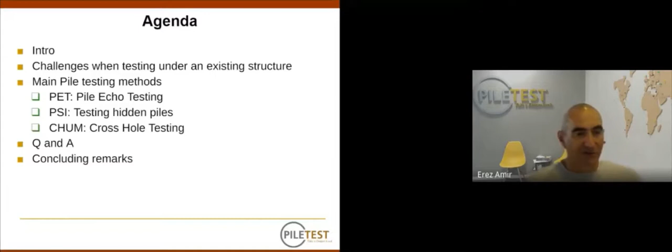Some definitions: a pile is a slender deep foundation element. It can be precast or cast on site. When I say slender, it means it's much longer than it is wide — something you probably already know.

A superstructure, or structure, for this presentation, is just anything connected on top of the pile. It can be a beam, a slab, a column, or the complete structure — anything lying connected firmly to the top of the pile.

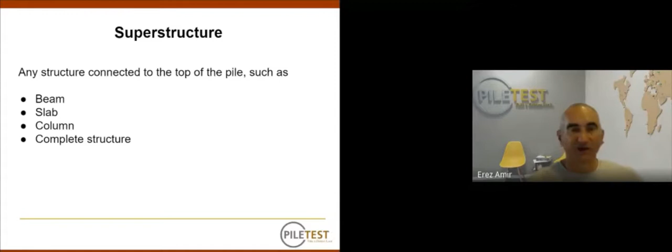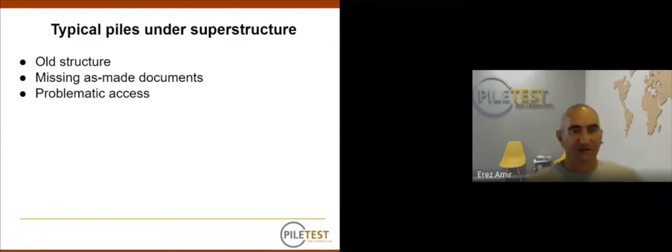The typical scenario for piles under a superstructure is that they are usually old. We don't have the as-made documents, or we have only very partial information. Also, typically, access is problematic. Not all cases are like this, but this is a typical scenario.

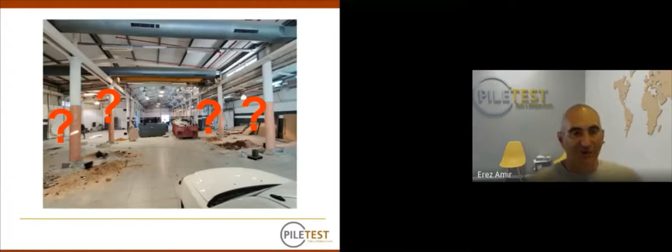So what are the challenges we face when testing the piles? First of all, we have limited or no information about the estimated length of the piles, the concrete type, the installation method, or the type of foundation. It can be a footing — we just can't know from the top.

Another issue is that the existing structure interferes with the pile — it actually changes its properties, the mass, the impedance, and the way the waves flow.

We also have a small sample. Usually the strength of pile testing comes from testing many piles and comparing them to one another, but under an existing structure, we have only a limited number of piles to test.

Physical access is also sometimes tricky, which makes testing conditions less ideal and harder to get quality information. Underground utilities such as basements can also interfere, as can sewage lines we don't know about. All these things add more and more challenges to testing under existing structures.

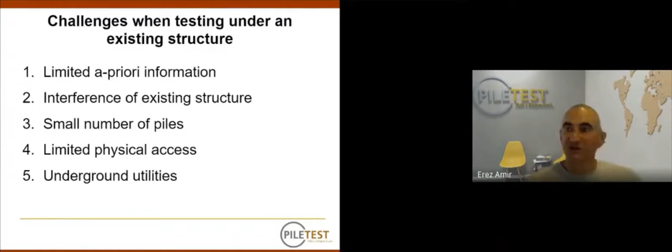The main integrity methods we are going to discuss today for testing under structures are, first, the pulse echo method. It's a very known and popular method backed by an ASTM standard. It is, let's say, so-so suitable for testing under existing structures. In many cases it is, but there are many caveats to watch.

The parallel seismic method is definitely suitable for testing under existing structures. In fact, it was designed for testing in those scenarios. The ASTM standard for this test method is currently in final ballot on the ASTM main committee, and it's going to be ready, I believe, within a month. The technical contact for the parallel seismic standard is Dr. Joram Amir, a co-founder in our company.

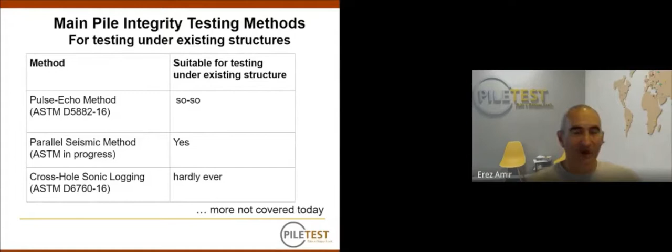The third method we're going to discuss is the cross-hole ultrasonic monitoring or logging, also called CHUM. This method will hardly ever be suitable for testing under existing structures, but I still want to mention it because there might be some cases where this could be applicable. So it's good to have this somewhere in the back of your mind that it's possible.

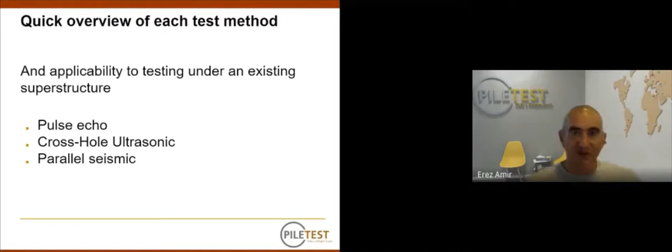So without any further delay, let's go into each of the testing methods and see how it's applicable. Let's go. First, we're going to discuss the pulse echo method, PEM, with our product PET. We're going to watch a short video, a 3-minute video, and then see how this method can be modified and applied to testing under structures.

PET, Pile Echo Tester, Low Strain Impact Testing. The mission: test the integrity of 12 concrete piles on this construction site. The tester goes to the first pile and prepares the top for testing.

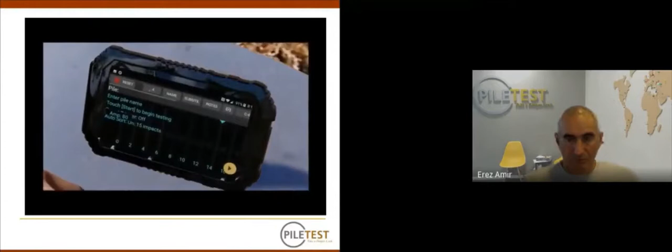A small amount of special putty is attached to the bottom of the PET. The PET is pressed against the pile top. The top is lightly hit with the hammer. A compressive wave travels down the pile and is reflected back from the toe. The blow is recorded on the screen. Good pile. The next pile has a defect that reflects the wave.

The reflectogram on the screen shows a necking at a depth of 5 meters. The test results are now analyzed in the office and the report produced. The PET, your compact yet powerful tool for testing the integrity of deep foundations. Thank you.

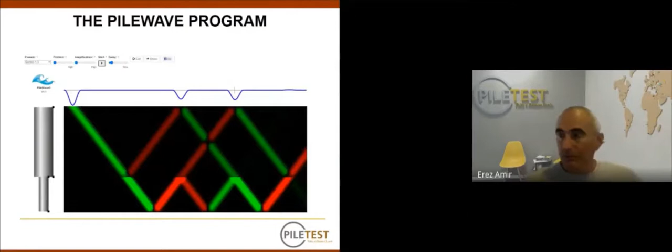Okay, and we are back. The next thing I want to show you is the Pilewave Program. The Pilewave Program is a simulation of wave propagation in piles, which gives some background about how this method works.

So when you go to the Pilewave application, you can see that screen. On the left, we see the shape of the pile. The main pane shows the way the waves are traveling down and up in the pile, and the top pane is the head velocity of the pile. So we can see that when we hit the top of the pile, let's do that with some delay.

Okay, so this is the hammer impact, and a compressive wave is traveling down the pile. The wave keeps on traveling until it reaches the bottom of the pile. At this stage, it is converted from a compression wave to a tensile wave, and then it reaches back the top of the pile, pulls it down again, and that's about it.

If we have some kind of a defect in the pile, for example a necking here, that's also going to reflect the wave. So some part of the wave is going to be reflected from this defect and from the bottom of the defect. Then the rest of the wave travels all the way down and back up, and we see the echo from the top. If, however, instead of a necking, we would have a bulge here, this part, instead of traveling down representing a compression wave, will be going upwards, like that.

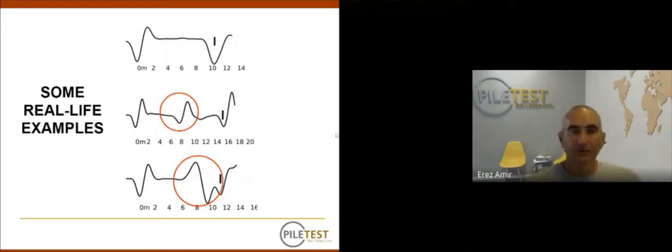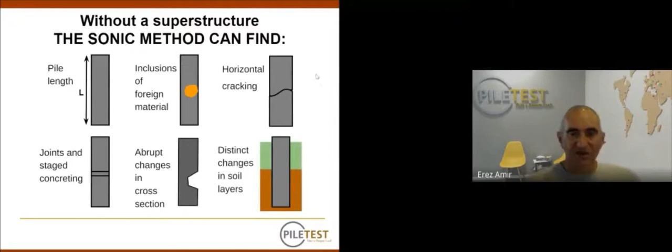If we wouldn't have a superstructure, like regular testing, the sonic test can find the pile length, inclusion of foreign materials if they are large enough, horizontal cracking, joints and stage concreting, sharp changes in the cross-section of the pile, and even distinct changes in soil layers. However, in our case, pile length is the only thing we can expect.

So how do we adapt the pulse echo method to test under an existing structure? I'm going to go over that very quickly for those who didn't get it.

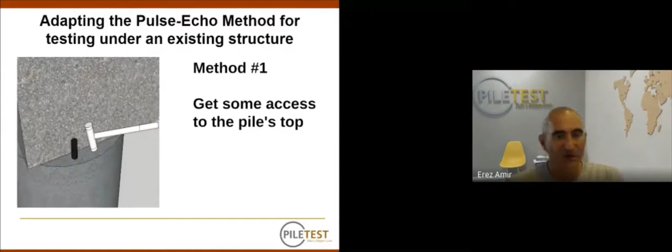When the top of the pile is round and the column is square, we can sometimes get some kind of a notch there. For example, here, in this case.

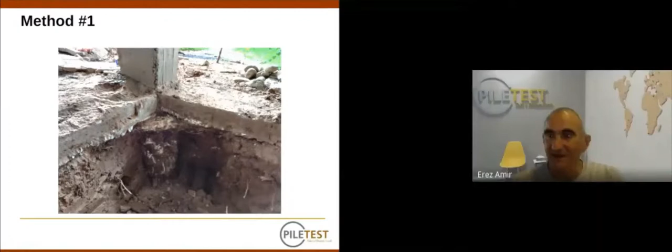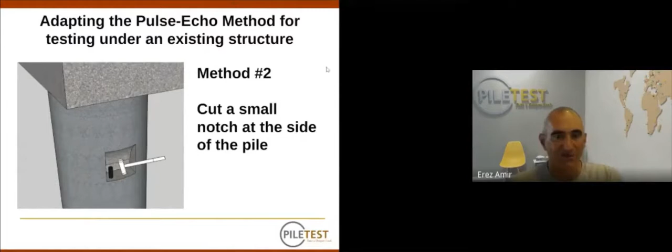Okay, yes, of course. We can test here. In this case, we have some access here to the top of the pile, or here. The other alternative, if we don't have access to the top of the pile at all, is to cut a small notch at the side of the pile. Like in this case, this is a part of a retaining wall, and this notch was cut into this pile. There's another example with the sensor inside, so you can see the side of the notch.

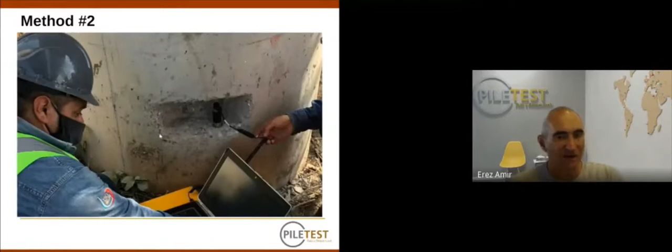It's constructively negligible compared to the size of this pile or column. In another case, another pile in a retaining wall, a small notch was cut there. You can see the hammer for proportion. This gives you a good option for testing with the pulse echo method.

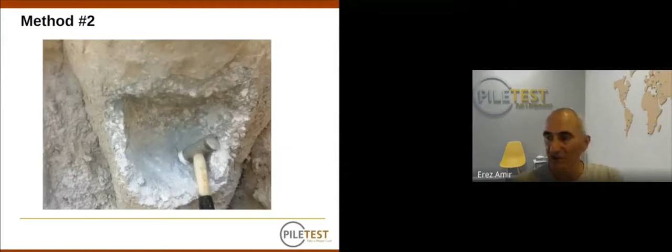Okay, and the first rule when testing under an existing structure is to lower your expectations.

The pulse echo method is highly affected by the waves from the superstructure. When you hit the pile and create a compressive wave going down, the same wave also travels up into the superstructure, and it can be reflected from any edge. It can be reflected from the ceiling or from the side of the beam. It can go sideways, upwards, anywhere. Moreover, the wave going into the superstructure is not attenuated as much as the wave going down, and there's no way of telling what the waves are doing in the superstructure. It can be very misleading.

For that, more than one pile, ideally many more, should be tested so that we can check repeatability. The assumption is that the piles are going to generate a similar signal, while the superstructure at each location is going to generate something different. So if we do get a repeatable result, we can assume with some certainty that it is really the pile and we are not just testing the ceiling or the beam.

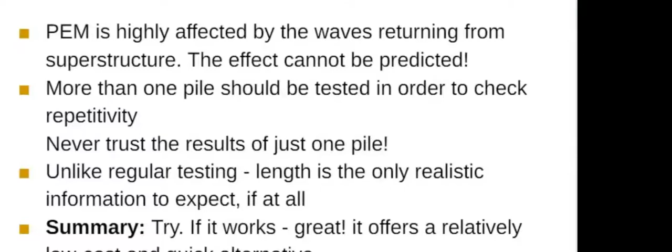Quick overview of the cross-hole testing, and then we're going to see also a 3-minute video.

For the cross-hole testing, at least two access tubes need to be installed or drilled into the pile. Then the test apparatus and the computer are going to be connected. We're going to lower into the tubes, which are filled with water, a transmitter and a receiver with cables. The cables go through our depth meter into the recording device.

While we pull the emitter and the receiver together, an ultrasonic wave is going to be transmitted, and we're going to measure the time of arrival and the energy as we pull.

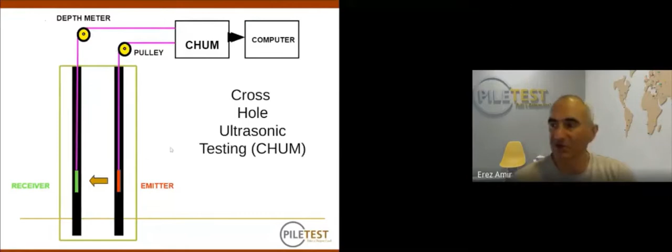Let's see a short video to demonstrate that. It's a 3-minute video.

On this site, large diameter bored piles were constructed. On the surface, they all look perfect. But are they? CHUM, compatible with ASTM standard D6760, looks for subsurface imperfections through the access tubes installed.

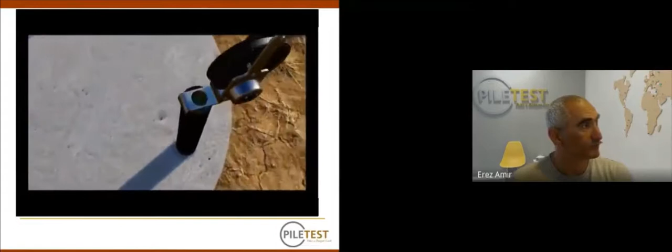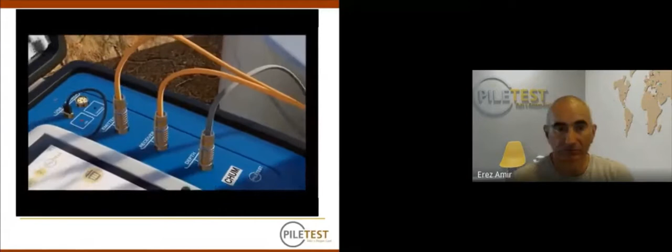Depth meter pulleys are placed on top of the water-filled tubes. Ultrasonic dual-function transceivers are lowered into the tubes, and lowered together all the way to the bottom, which may be 100 meters below ground level.

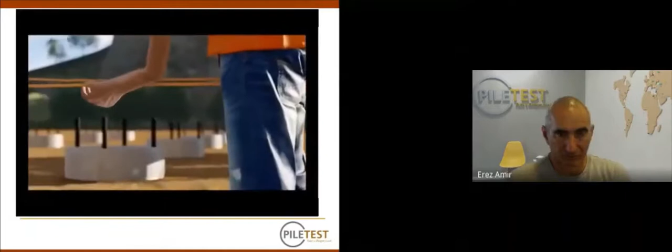When the sensors are level, the computer connected to the CHUM gives the order to pull. While both cables are pulled together at a speed as fast as 2 meters per second, the location of the sensors is shown on the screen in real time. Ultrasonic pulses are continuously sent from the emitter to the receiver, and anomalies, such as increased arrival time or lower energy, are immediately displayed. CHUM automatically adjusts signal gain for optimal signal quality under variable conditions.

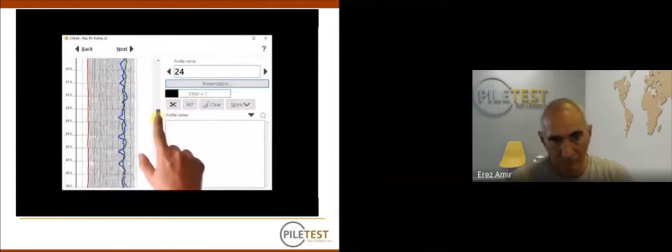CHUM also supports 2D and 3D tomography. Both sensors exit the access tube together, and the ultrasonic profile is already on the screen: first arrival time, relative energy, wave speed, and the waterfall presentation. Other profiles are logged the same way.

The data is analyzed by the engineer, who checks for any inconsistencies, adds his comments, and prints the report.

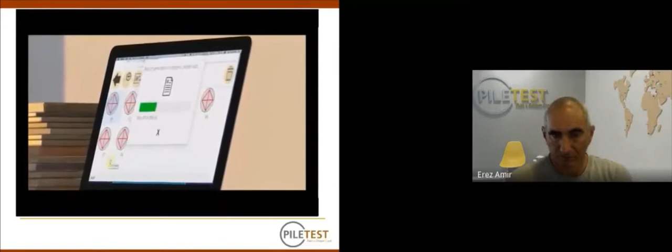This, in short, is the CHUM, our cross-hole ultrasonic monitor. It is portable, rugged, and productive. Due to the use of a detached computer, the CHUM will never become obsolete.

Okay, so now that you have some basic understanding about the cross-hole testing, how can we adapt this test method for testing under an existing structure? And here it becomes very tricky. Since the top of the pile is not accessible, our only option is to drill several core drillings through the superstructure into the pile throughout its length. This is hardly ever possible or practical.

However, if we're talking about very expensive piles, very massive piles, and a critical superstructure, this might be the only option. When we do manage to do that, let's just talk about that point for a second.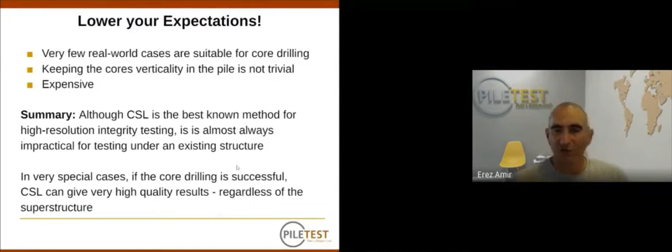In these cases, the quality of the test is going to be very high, and the superstructure will have zero interference with the test. The third test method we're going to discuss is the parallel seismic method. The standard for this method, as I wrote, is already in final stages and will be ready within a month.

So the parallel seismic method is set up like that. If that is the pile and the superstructure, we need to drill a parallel access tube all the way down to the bottom, to the expected length of the pile, and at least 5 meters more. The tube must be non-metallic, and it must be as close as possible to the pile.

The soil should be saturated to pass the waves, and the tube should be filled with water. Once we have this set up, we lower a hydrophone, like a water microphone, into the access tube, parallel to the pile, and we hit the pile or the superstructure in any location, as long as it's uniform. We have to hit the same location every time.

As we hit, we lower the hydrophone in fixed intervals. Whenever the hydrophone is still parallel to or in front of the pile, the wave speed we get, the arrival time, represents the speed of the wave traveling through the concrete. Once the hydrophone passes the toe of the pile and starts going into the area of the soil, the wave speed we get will be the wave speed in soil. And we're going to catch this breakpoint in the wave speed.

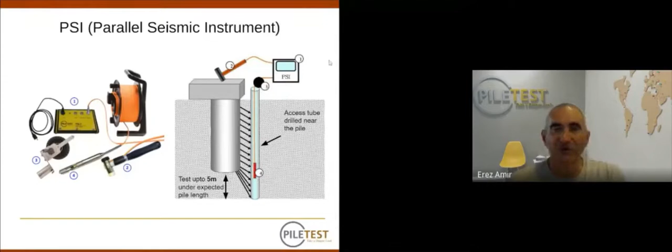The accuracy that we're going to get is approximately 1 meter, and it depends on many, many factors.

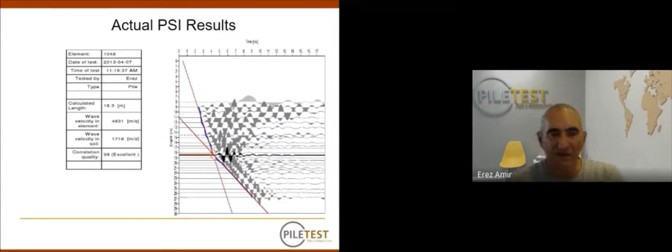I want to emphasize that the parallel seismic method is designed for testing under existing structures. With all its shortcomings, it's still the only method designed just for that. Note that a parallel access tube must be drilled, it must be non-metallic, the soil must be saturated, and the strata should be uniform. If we have many layers or rock, it's probably not going to work. The accuracy of this method is going to be affected by many, many factors.

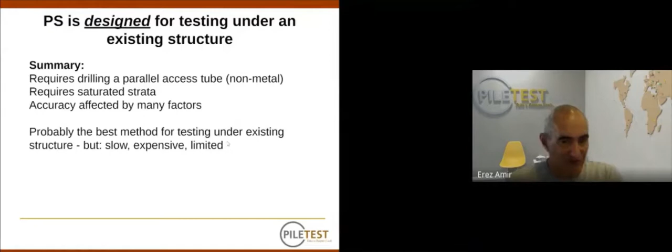Still, it's probably the best method for testing under existing structures, albeit slow, relatively expensive, and limited. Note that the only information you're going to get is length, nothing more. So we've gone all around the three testing methods that we offer for this scenario: the pulse echo method, the cross-hole ultrasonic, and the parallel seismic.

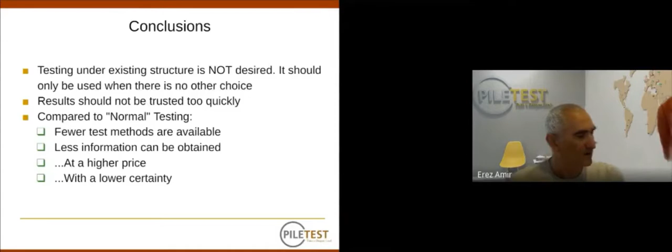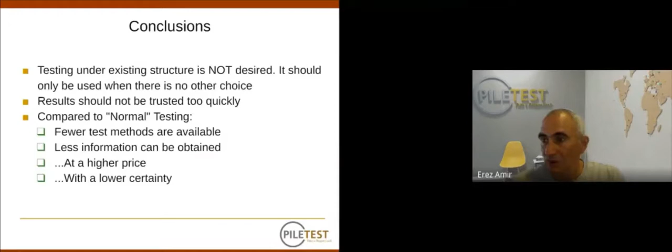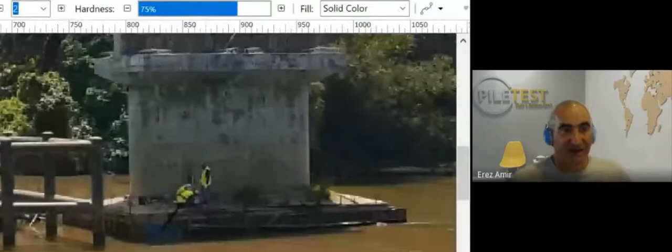Okay, so what we see here is something we have no idea about. We have no idea if there is a single monopile under this massive head, or a group of piles. It could be a footing.

The first thing I would do is detective work. We have to apply all the information retrieval that we can in order to find the engineer who designed that, to know what was done there, even if it was done 30 years ago. We can still find some records. We have some veteran engineers who can tell us what was the common construction practice in those days, what augers and drilling machines were available then, and what was the common practice. If we have some kind of project nearby, we can try to find out what was done on that project. From all this, we can get an educated guess, a guesstimate about what's expecting us underground.

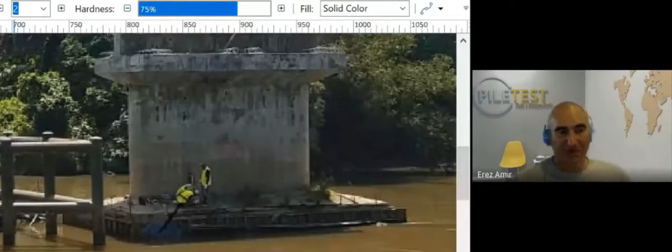Of course, every project is different, everything is different. But if 30 years ago we wouldn't have had a drilling machine that can go below 30 meters, then that's probably an upper limit. Detective work like that is going to be much cheaper than starting to test. It's like a literature survey.

So once we have all this, the best guess we can make, assuming these are actually several piles under this head, is that drilling from the top is probably impossible, and this pile is probably quite massive. So a pulse echo method will probably not work.

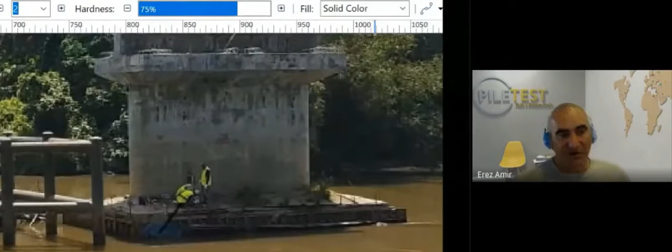A parallel seismic would be the only alternative. A drilling machine needs to be positioned somehow, and an access tube needs to be pushed at least 5 meters below the expected length, and then parallel seismic would be the only way to go.

Okay, so basically what you're saying is that you need to find a way to drill in the water a parallel tube to be able to do a parallel seismic test for this.

Correct. Please note that the access tube needs to be as close as possible to the actual piles, let's say 1.5 meters would be an upper limit. So that's going to be tricky here, but it's still possible. As I told you, it's not an ideal case.

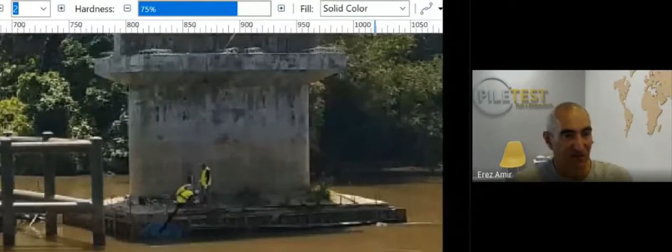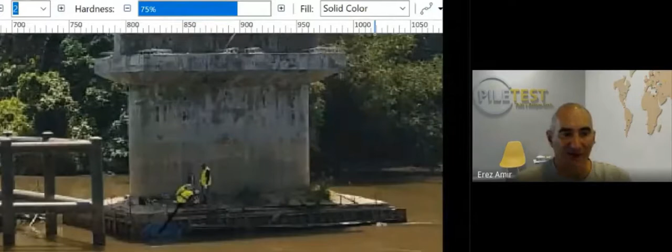It would be much better to test the piles before the head was made, but I guess that's the only alternative right now. By the way, if this is a new construction, there would be a record of the piles. If someone wants to test the integrity of the piles under these superstructures, that's over-expecting. There's no way to test integrity of the piles under that - we can only learn about the length.

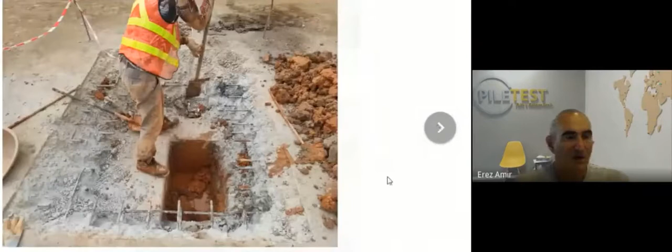In dynamic testing, we still use 1D wave theory. Why not use 3D wave theory instead? Well, in dynamic testing and also pulse echo testing, since we are talking about a slender pile where the length is much longer than the width, for example an L/D ratio of more than 10, after 1 or 2 diameters the waves become one-dimensional, and there is no point in going into the 3D theory in this case.

Okay, Mr. Amir, what about skin friction from pile information? Can we get it, and how can the test be done in sheet piles?

Skin friction information is not something you can get when testing under an existing structure. That's over expectations. But in regular testing, when testing with the PET, the amplification needed to bring the pulse back to a normal shape can give you some idea about the skin friction.

Sheet piles cannot be tested because their L to D ratio is too high to get any signals, any echo from the toe of the pile. This was also a similar question from Andre: could a test be performed in sheet piles? No. To know if there's a crack in the splicing joint? No, that's really way over expecting from any of these test methods.